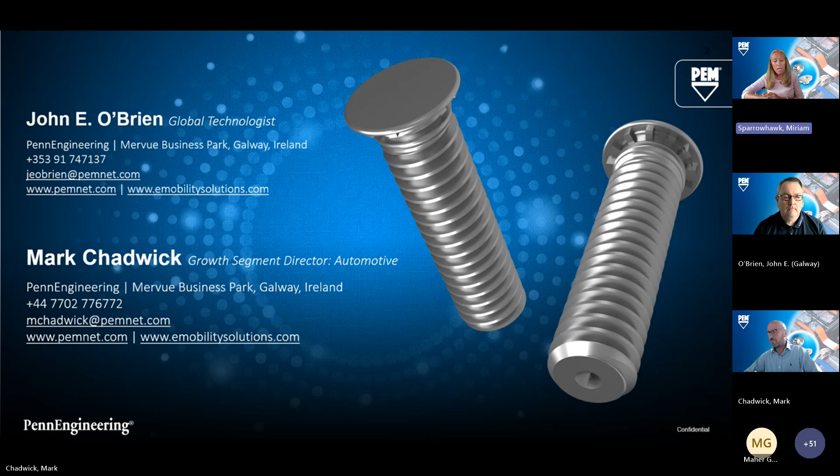Thank you, Miriam. And yeah, just to reiterate, thank you everybody for your time today and your participation. I'm going to kick off before I hand over to John, who's going to go through some of the technical detail here about ingress protection. But I just wanted to start with, touch on why ingress protection is important. We all know about it, we've all heard it, but there's a number of reasons here, and it's becoming more important.

And I think firstly, we talk about, obviously, products in harsh environments. It's key that we protect the internal components. And that could be in multiple industries and multiple ingress ratings, and we'll touch on what those ratings are. But it's clear that when we put products in harsh environments, to make sure they perform efficiently and with longevity, and to reduce the potential warranty claims and downtime of critical systems, we have to protect those internal components. And that's not just from dust. It could be from moisture or water and other contaminants.

I think on top of that, obviously, as a supplier, we want to make sure we've got a sustainable business. If we're supplying product that's going to the end market and the end users are having issues, it's not performing as it should, that reflects badly on the supply chain. So for us, building that ingress protection assembly with fasteners in it is critical. And again, we can talk about automotive or consumer electronics and the different ranges, but our customers have choices. We want to make sure the products that we design, that we supply, work as they should in the harsh environments that they're meant to. So I just wanted to touch on that.

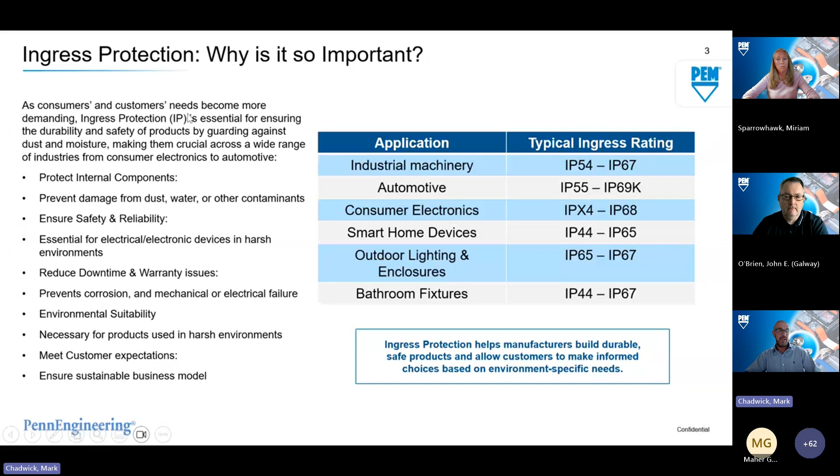I'm going to hand over to John O'Brien, who's going to go through now just how we rate ingress protection. And again, there's ways to rate it. What does it mean? How can we achieve that with current solutions? What's PEM's offering to the market? And important for our customers, how can we confirm and how can we ensure that products we supply meet and are tested to certain specifications? So, John, I will hand over to you to go through the next section of the webinar, please.

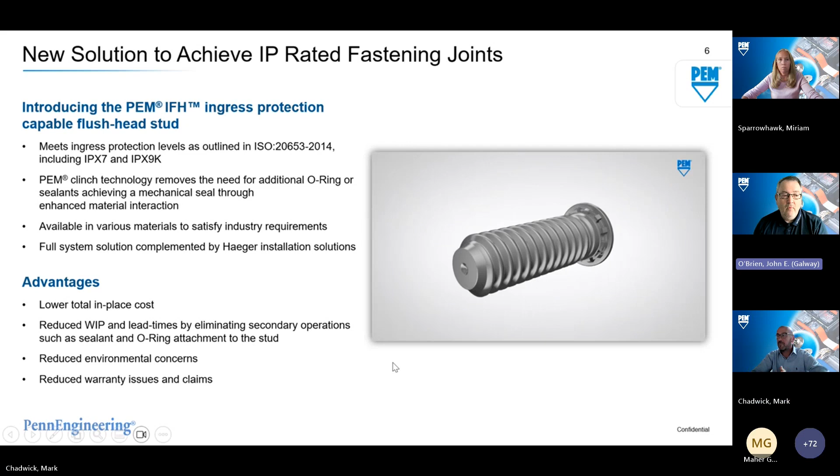So we're going to move on to the next slide, and I'll show you some more details on how it works. So Mark, if you want to play the video while I'm talking about this here. We meet the ingress protection levels and exceed them actually, and I'll show you that in a moment, how we can prove that we exceed them for IPX7 and IPX9K.

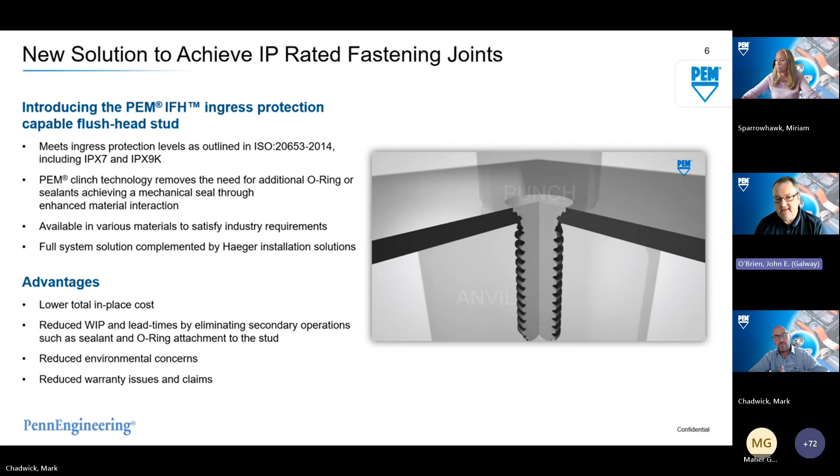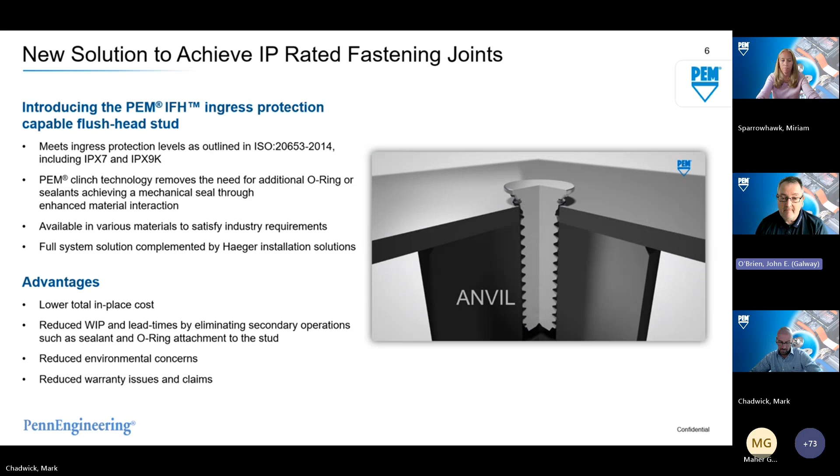And as I say, simple, punch a hole in the panel and then you press in the fastener and it actually exceeds IPX7 and exceeds IPX9K, and it's available in many materials, including mild steel, stainless steel, copper, aluminum, all of the above. And it's available with Haeger auto feed systems, so that you can achieve that high speed, low cost, with reduced WIP and reduced environmental and reduced warranty issues.

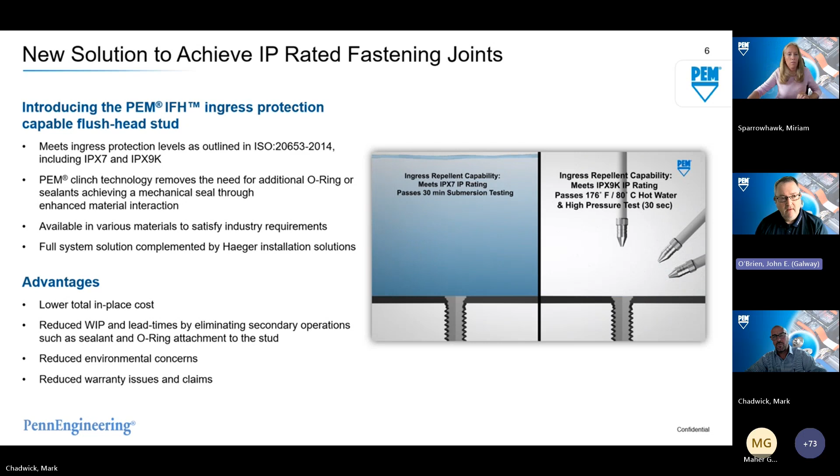So what I will do is move on to the next slide, and we talk about how we test for IP ratings. And this is the standardized way we test. So as I was saying earlier, the standard is written with water in mind. So IP67, 68. IP67 is submersion for 1 meter for 30 minutes. IP68 is where you go either deeper or for a longer period of time.

And this is the test rig here on the right-hand side that we have in our lab. In this, what we do is we install fasteners, we seal them in the rig, we add water, and we invert them so that the water is at the back of the fastener. On the front, we spray a water detection spray that goes green in the presence of water. And then using compressed air, we can simulate any depth up to, I think, about 100 meters.

And this means that we can test our product to whatever the customer requirement is, exactly to the ISO 20653 standard. And what we have found is that all of our parts have passed on this test. Likewise, we built a test rig for the IPX9K.

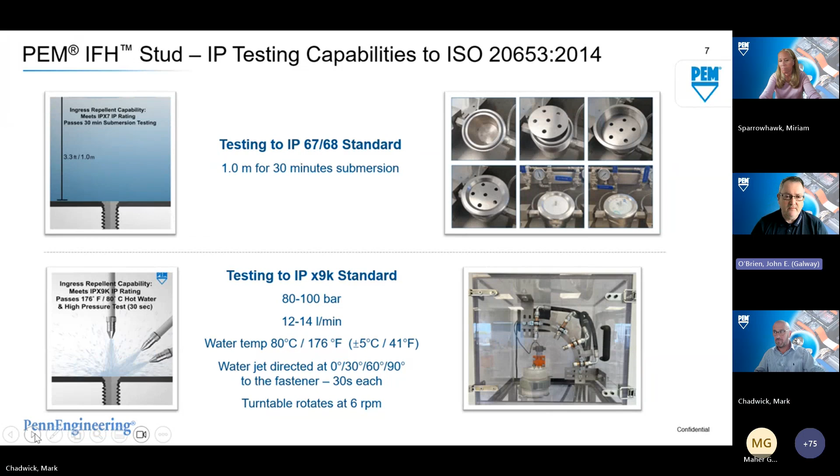So what we've done is we have taken the new advances in industry, and Mark, if you move to the next slide. So the new advance in industry when it comes to leak detection is to use helium vacuum leak detection. The way this works is that you take a helium-rich environment here and you suck it through the joint. Now, as you know, helium is a very, very small molecule. It's the second smallest molecule available. Hydrogen obviously is smaller, but to be quite honest, hydrogen leak testing is only for the very adventurous. Helium is much, much safer, and that's why we've gone with that.

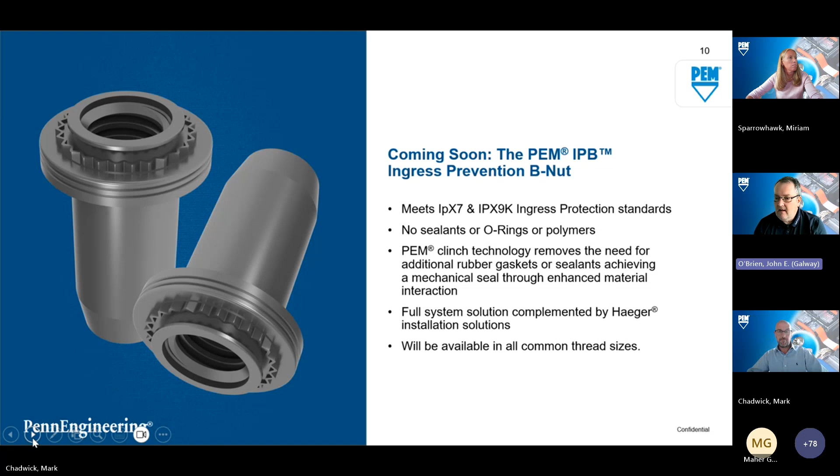So Mark, if you want to move on to maybe cover the summary slide. Yeah, thank you. Well, thank you, John, for that information. I suppose just one thing to add on the last slide.

Like John said, if anybody's got a current application, this is going to be released as a standard product. We're able to support applications now if you've got a solution or an opportunity where you need a blind nut. It's something that we can start working with you on straight away. So while we're releasing the standard product, feel free to contact John, myself, or your local distributor or direct PEM partner to discuss your specific application.

So before we move on to the Q&A, I just wanted to summarize this slide and what John's talked about. The IFH stud, like John said, is available, but the IPB, which will be the nut, which is coming very soon, obviously offers the same advantages. First and foremost, we're aware that lower in-place cost for you is critical. And that means using the PEM clinch with the Haeger installation solution.

That also gives you the confidence that every installation is monitored and achieved to be a successful installation. The aim here is to reduce warranty issues and downtime in the field. We don't want the products we're putting our fasteners into that you are supplying to your end customers to fail, because that means warranty claims, but it also means that the system inside potentially is becoming damaged.

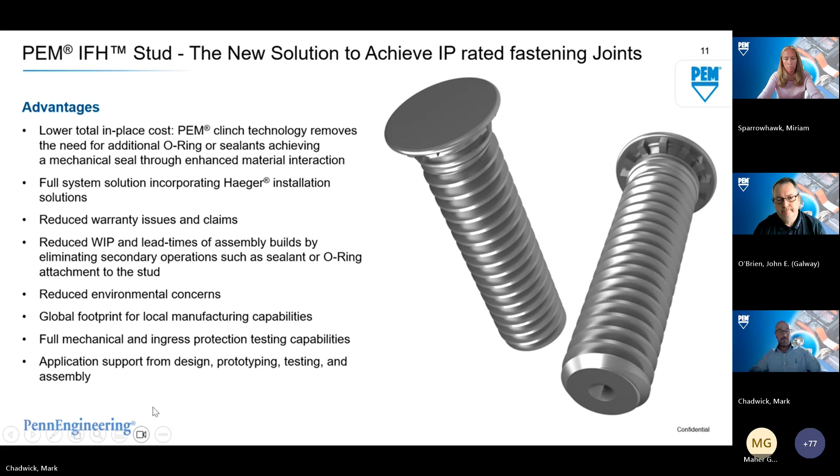And then finally, we're going to help you with installation, be it yourselves or your production partner, to give you the right installation solution, the most efficient installation solution. So thank you, John, for your technical overview.

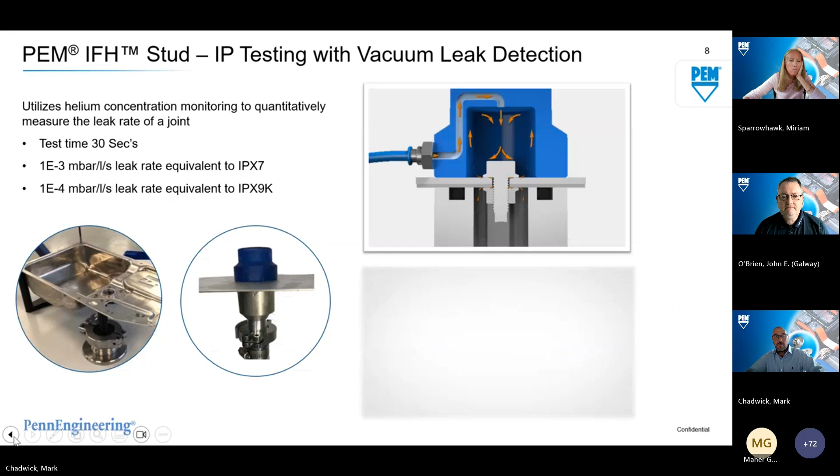Thank you, John. Another one about ratings, John. Question is, in industrial environments where there's fine metallic dust, what's the sort of minimum IP rating we would recommend for that? Well, if we go back to, and Mark, if you scan back to the IP slides there, I think it was slide 4, this one here. So if you look at this here, no ingress of dust permitted is IP6 and protection against 6. So it's 66. IP66 is the minimum where you don't want any dust ingressing. Beyond the first digit 6, there is no level. You're into liquids at that stage.

And beyond IPX9K, you've gone into a gas tight situation, which is a different testing again. And that's a different role again, but that's something also that we can talk to somebody about. If they've got a gas tight requirement, we can talk to them separately about that. But to be quite honest, IP66 is the answer. Thank you.

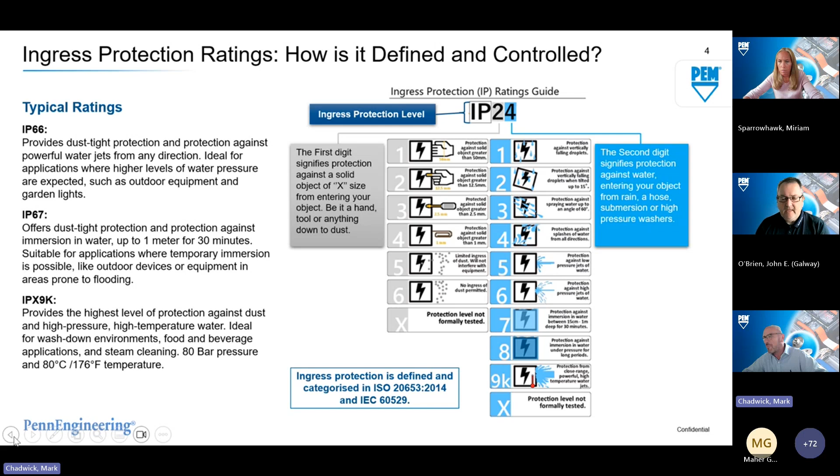So when you use the Haeger for the install, we give recommended settings on what a fully installed part looks like. Once you achieve that, you will achieve this performance. Just follow the recipe. It's pretty much as easy as baking a cake in this case. Just follow the recipe, and what you'll get out the back end is very good.

Yeah, thank you. And the second one, John, is about our customers who've already got Haegers. Is this special tooling they need to order for the Haeger, or can they use the standard FH tooling? The standard FH tooling works in this case. And this is what we've used in doing our test. Magic is in the part, not in the tooling. For much thicker panels, and it depends how thick you want to go with this, we might recommend using raised ring tooling.

Yeah, I think the one thing for everybody here is, I would recommend, if you've got an application, we can do the testing for you. And like John said, by doing the helium leak testing, it reduces the time constraints. So each test, I think, John, you said, is 30 seconds. So we can give you that data in your application with the specifics. So I would encourage that's the way we would like to work on these applications. Let us help you.